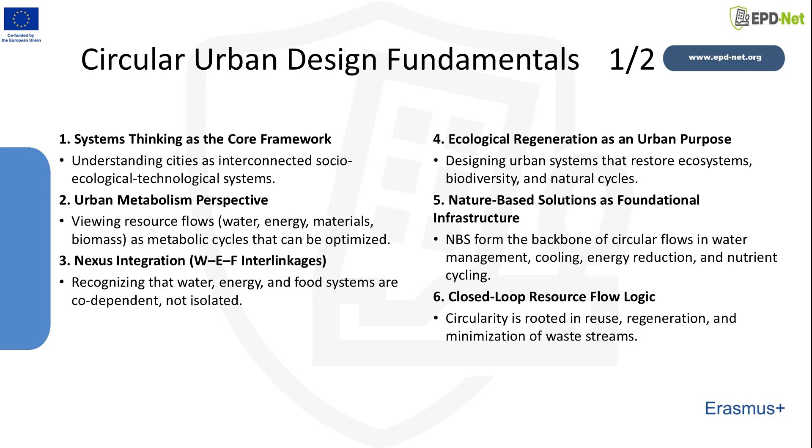This slide visually reinforces the same six points. What is important here is not to read them as separate ideas, but as a connected framework. Systems thinking, ecological regeneration, and nature-based solutions all work together.

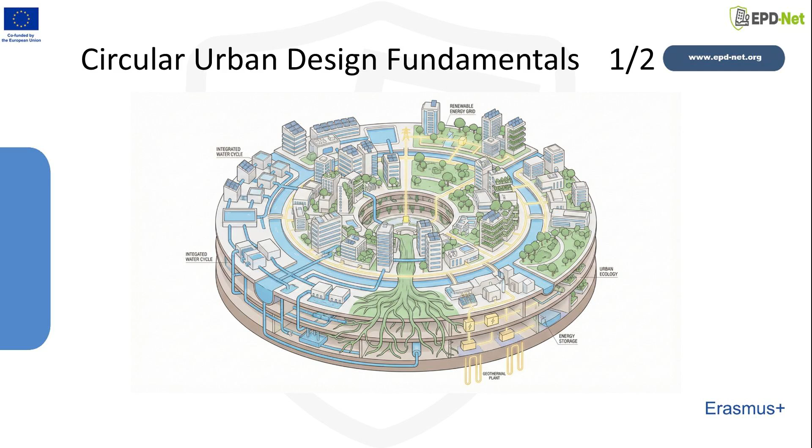In circular urban design, the city is no longer seen as a place where resources simply enter and leave. Instead, it becomes a place where flows can be restructured, supported by ecological processes, and redesigned to reduce loss and increase long-term urban performance. The second half of the fundamentals adds four more important ideas.

The seventh is multifunctionality, meaning that urban elements should deliver ecological, social, and technical benefits at the same time. The eighth is decentralized and distributed networks, which support local loops and reduce dependence on single centralized systems.

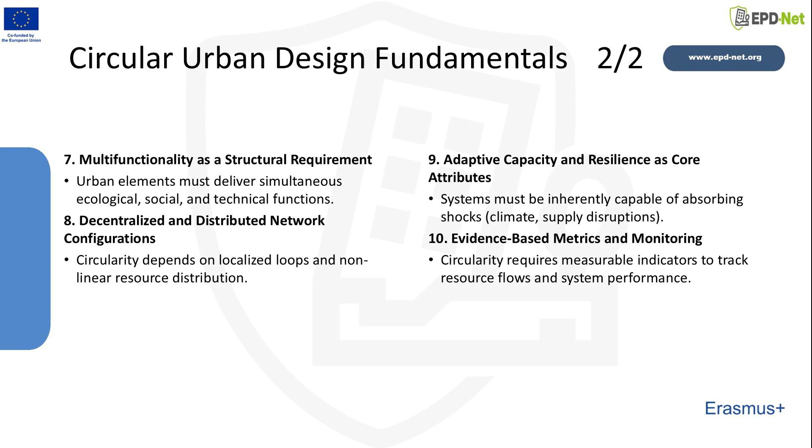The ninth is adaptive capacity and resilience, because circular systems should be able to absorb shocks such as climate stress or supply disruption. The tenth is evidence-based monitoring, since circularity requires indicators and measurable performance in order to be effectively managed over time. This slide continues the visual presentation of those last four principles.

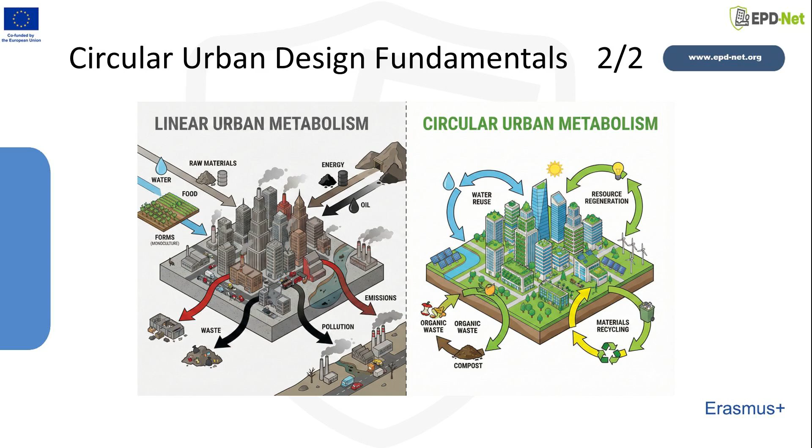Together, these ideas show that circular urban design is not only about reducing waste. It is also about creating urban systems that are more flexible, more integrated, and more capable of responding to change. Multifunctionality, decentralization, resilience, and monitoring help translate circularity from a broad vision into an urban design approach that can be assessed and improved over time.

After defining the fundamentals, we now move to the principles of circularity in urban systems. While the previous slides introduced the conceptual foundation, this section focuses more directly on how circularity can guide planning and design decisions. These principles help us understand what kind of interventions are needed if we want to move from a linear model of resource use toward more regenerative and interconnected urban systems.

The first six principles are listed here. First, we should prioritize resource efficiency before expanding supply, which means reducing demand before adding new infrastructure. Second, we should design multifunctional solutions, so that one intervention can solve several problems at once. Third, circularity requires us to close loops through reuse, recovery, and regeneration.

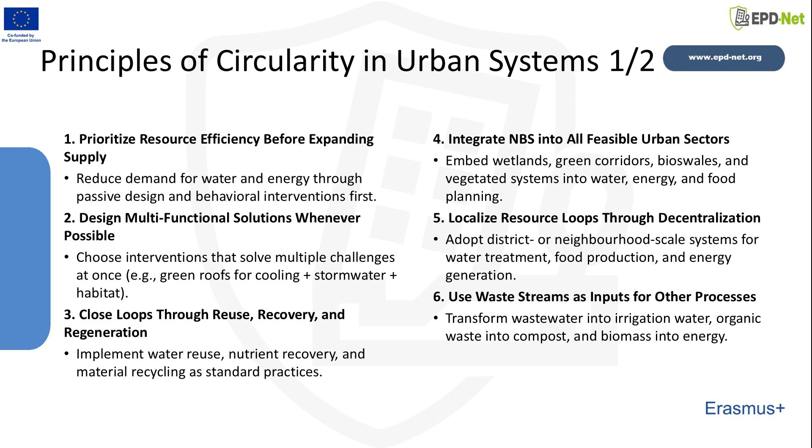Fourth, nature-based solutions should be integrated into all feasible urban sectors. Fifth, resource loops should be localized through decentralization. And sixth, waste streams should be used as inputs for other processes, turning wastewater, biomass, and organic waste into useful resources. This slide emphasizes those same first six principles in visual form.

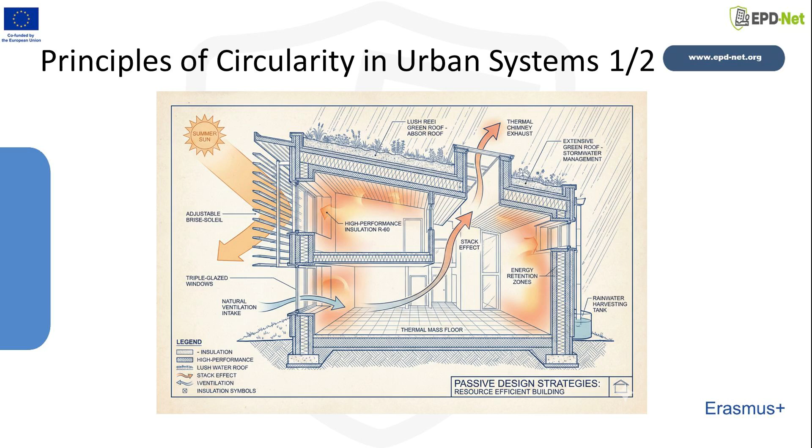The key message here is that circularity depends on a shift in logic. Urban systems should not be organized around one-way flows and end-of-pipe disposal. Instead, they should be designed around reduced demand, repeated use, and interconnection between systems. What looks like waste in a linear model may become a valuable input in a circular one. This is one of the central changes in circular urban thinking.

The second half of the principles focuses on enabling conditions. First, interventions should be designed for climate adaptation and resilience, meaning that they should contribute to flood mitigation, heat reduction, or redundancy. Second, circularity requires stakeholder engagement across sectors and communities, because no single profession can manage all urban flows alone. Third, governance, policy, and finance must be aligned to support circular solutions.

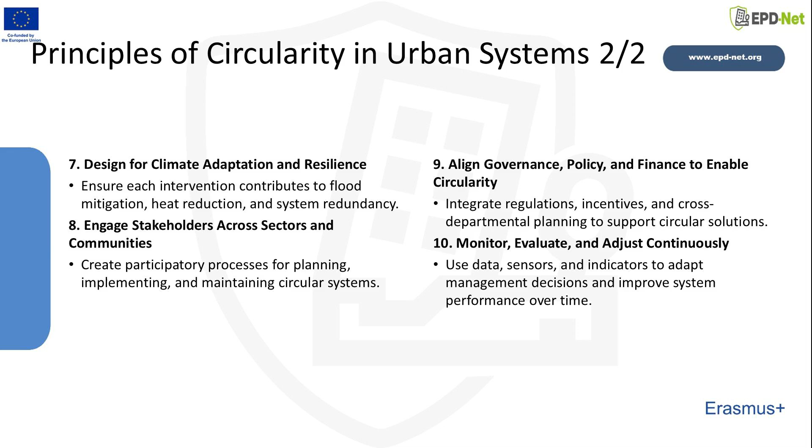And fourth, circular systems need to be monitored, evaluated, and adjusted continuously. Circularity is therefore not a one-time design act, but an ongoing process of learning and adaptation.

This slide reinforces an important point: circular urban design is not only technical. Even the best design solutions will remain limited if institutions, communities, and governance systems do not support them. That is why resilience, participation, policy support, and monitoring are essential.

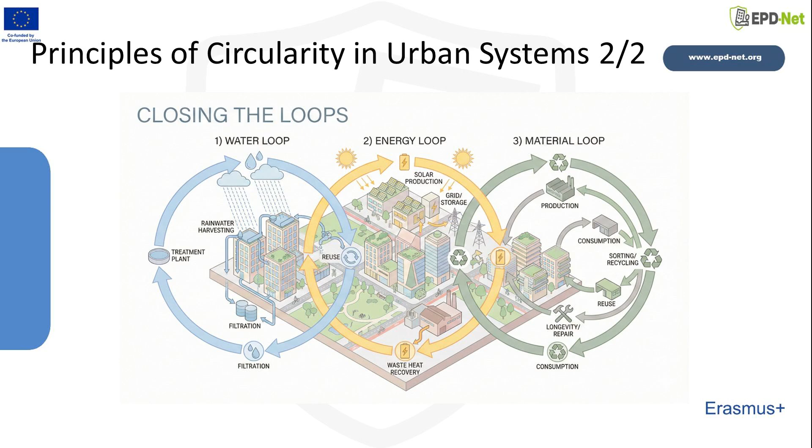Circularity needs collaboration, institutional continuity, and regular evaluation if it is to become part of mainstream urban practice rather than remain a small-scale experiment. This section introduces the transition from linear to circular flows.

It shifts the discussion from broad principles to the actual movement of resources through the city. The question is no longer only what circularity means, but how water, energy, and materials can remain in use for longer, how waste can be reduced, and how urban systems can be redesigned to function through loops rather than one-way extraction and disposal. The first 5 key points explain the core problem and the basic alternative.

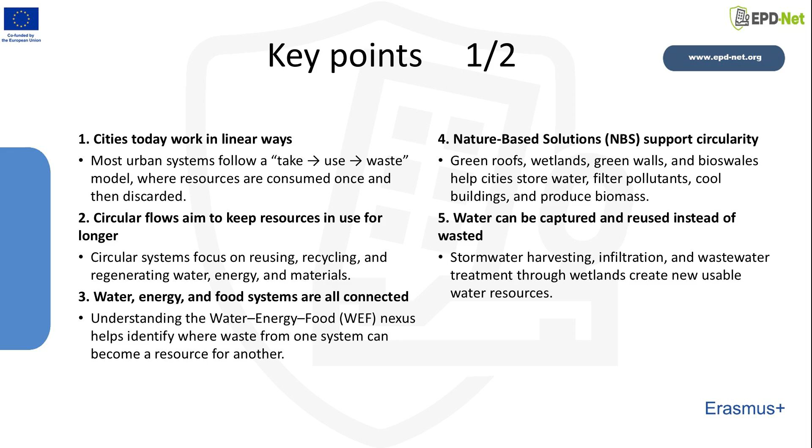First, cities still largely work in linear ways, following a take-use-waste model. Second, circular flows aim to keep resources in use for longer through reuse, recycling, and regeneration. Third, water, energy, and food systems are interconnected, which is why the WEF nexus is important. Fourth, nature-based solutions support circularity by storing water, filtering pollutants, cooling buildings, and producing biomass. And fifth, water can be captured and reused through stormwater harvesting, infiltration, and wetland-based treatment rather than simply being drained away.

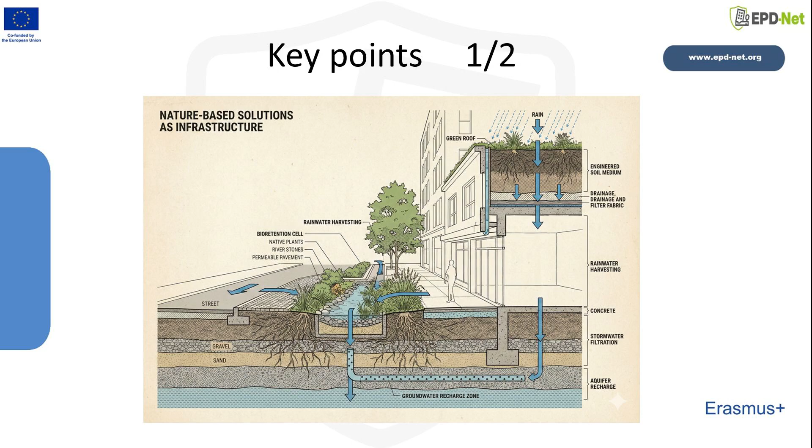This slide visually continues the same argument. The key issue is that linear systems generate loss at every stage. Circular systems try to slow down those losses and convert them into useful cycles. Water is one of the clearest examples. In many conventional cities, stormwater is treated mainly as a drainage problem. In circular urban design, that same water can be retained, filtered, infiltrated, and reused in ways that support both ecological and urban performance.

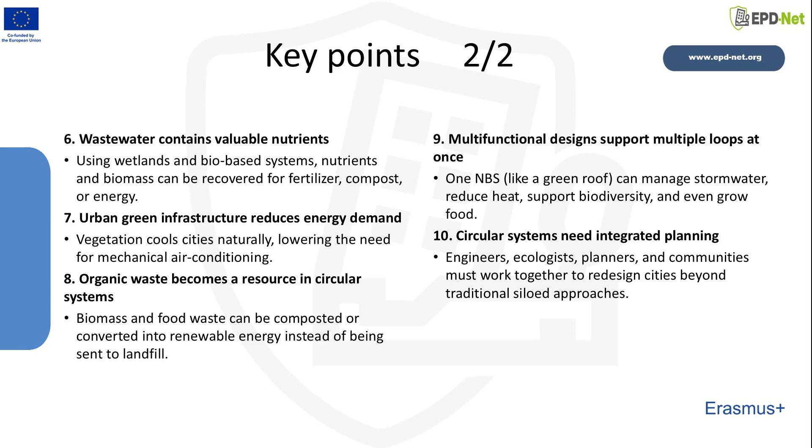The next 5 key points extend this logic. Sixth, wastewater contains valuable nutrients, which means it can support fertilizer, compost, or energy production if treated appropriately. Seventh, urban green infrastructure reduces energy demand by cooling cities naturally and decreasing reliance on mechanical air conditioning. Eighth, organic waste becomes a resource when it is composted or converted into renewable energy. Ninth, multifunctional designs support several loops at once, as in the case of a green roof that manages stormwater, reduces heat, and supports biodiversity. 10th, circular systems require integrated planning across professions and sectors.

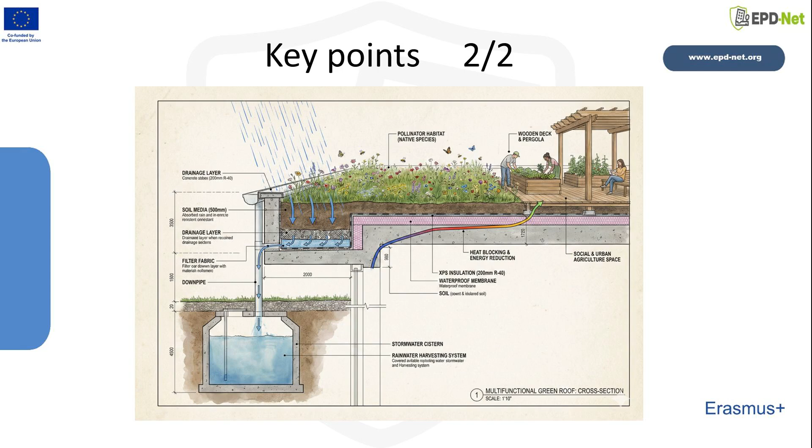This slide reminds us that circularity is most effective when systems are not planned in isolation. Water, biomass, materials, ecological processes, and urban design decisions all interact. That is why engineers, ecologists, planners, designers, and communities need to work together. Integrated planning is not just an organizational preference here. It is necessary because circular systems depend on the relationships between different flows and different forms of expertise.

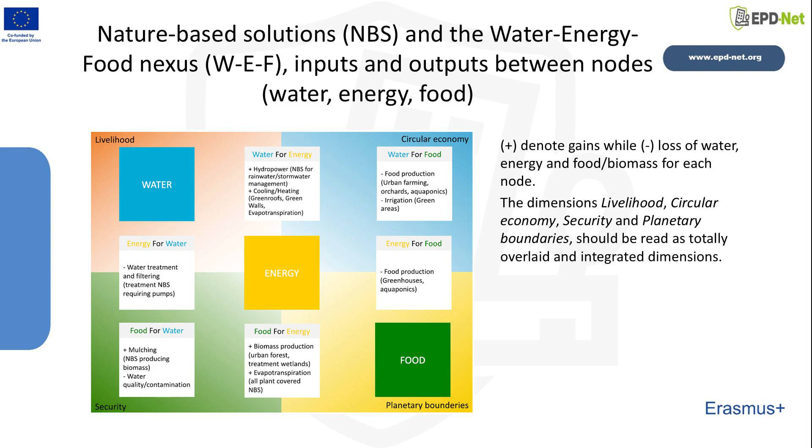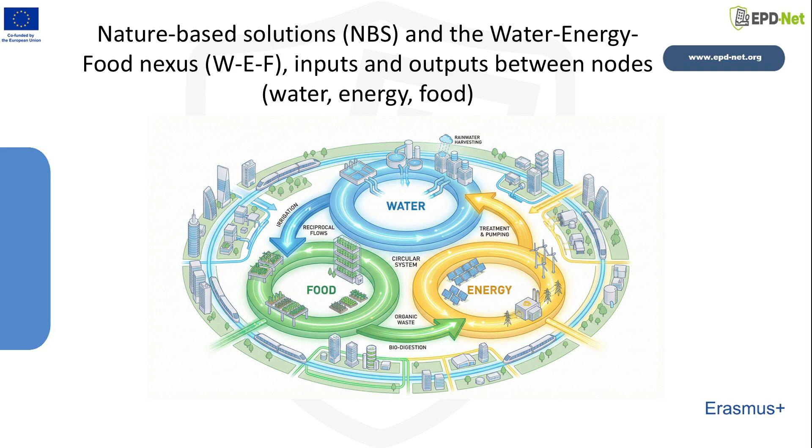Nature-based solutions help strengthen these connections in more circular ways. What is especially important in this diagram is that broader dimensions such as livelihood, circular economy, security, and planetary boundaries are overlaid on top of the resource flows. This means circular urban design is not only about technical efficiency. It is also connected to social well-being, economic models, long-term resilience, and environmental limits. The WEF nexus therefore becomes more than a technical tool. It becomes a way of seeing cities as layered systems in which ecological, social, and infrastructural processes are deeply entangled.

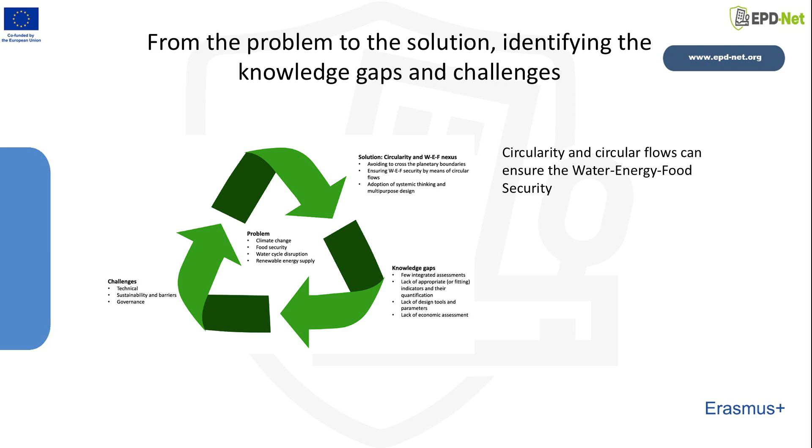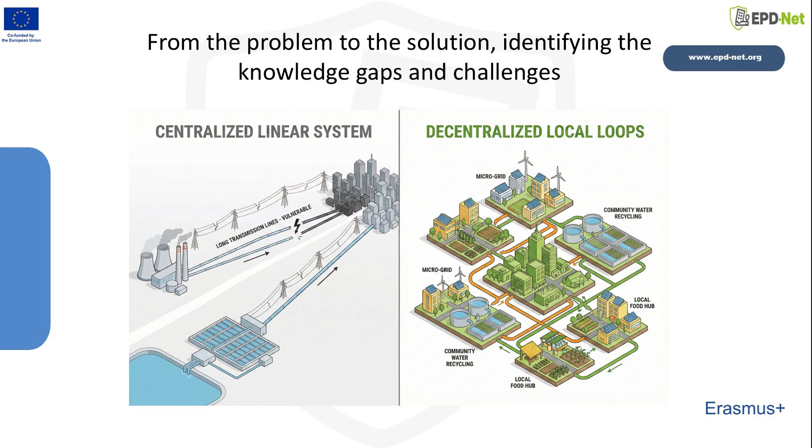Circularity requires us to recognize where the gaps are, whether they concern coordination, awareness, technical capacity, or cross-sector understanding. The broader message here is that circular flows can help ensure water, energy, food security, but only if the gaps between problem recognition and solution development are addressed. In other words, circularity depends on learning as much as on infrastructure. It depends on connecting sectors, combining different types of expertise, and moving from isolated technical responses toward system-based strategies that respond to multiple urban challenges at once.

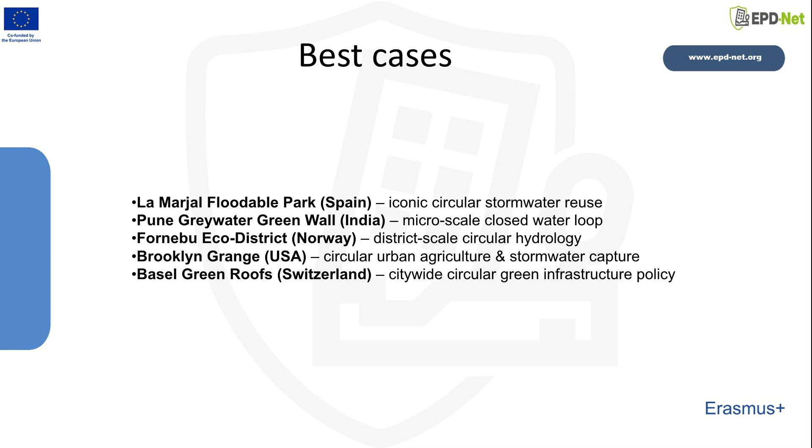The presentation now turns to a set of best cases. These examples are important because they show that circular urban design can operate at multiple scales and in different forms. Some cases focus on floodable public landscapes, others on greywater reuse, district redevelopment, productive rooftops, or citywide policy. Together, they demonstrate that circularity is not limited to one model. It can be adapted to different urban conditions while still following the same basic logic of reuse, regeneration, multifunctionality, and integration.

La Marjal Floodable Park is presented here as an iconic example of circular stormwater reuse. The project demonstrates how a single urban space can perform several functions at once: flood protection, water storage, water reuse, climate regulation, biodiversity support, and community education. This is a strong example of circular urban design because it combines infrastructure and landscape instead of separating them.

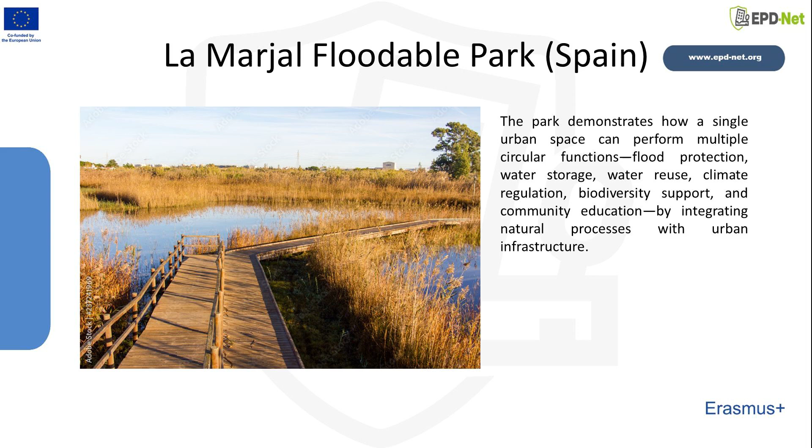Water is not treated only as a hazard to be removed, but as a resource to be retained and managed through a multifunctional public space. This image reinforces the idea that circularity can be spatial and visible.

La Marjal is not hidden infrastructure. It is a public urban landscape that makes circular water management legible. That is important because circular urban design often works best when ecological and technical processes are not concealed but integrated into public space.

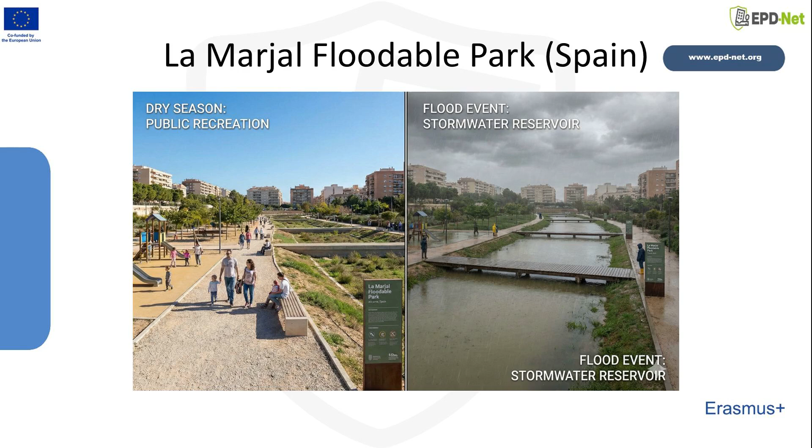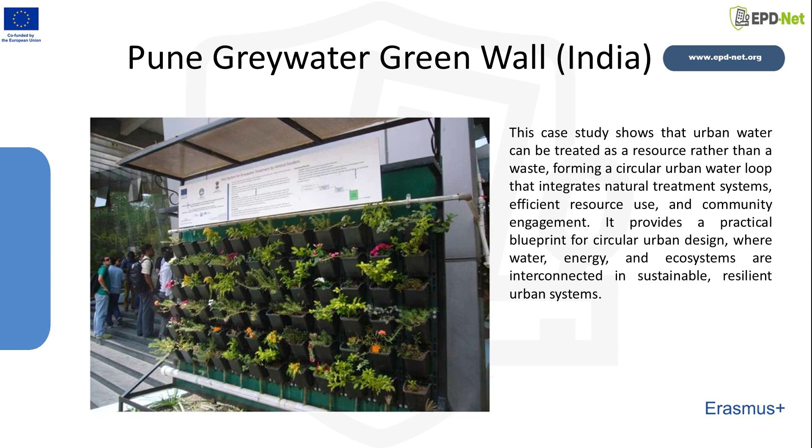The project shows how natural processes can support flood control while also improving urban amenity and environmental quality. The Pune Greywater Green Wall case shows that urban water can be treated as a resource rather than a waste product. It demonstrates a micro-scale circular urban water loop by integrating natural treatment systems, efficient resource use, and community engagement. The project is valuable because it proves that circularity does not only belong to large-scale infrastructure projects.

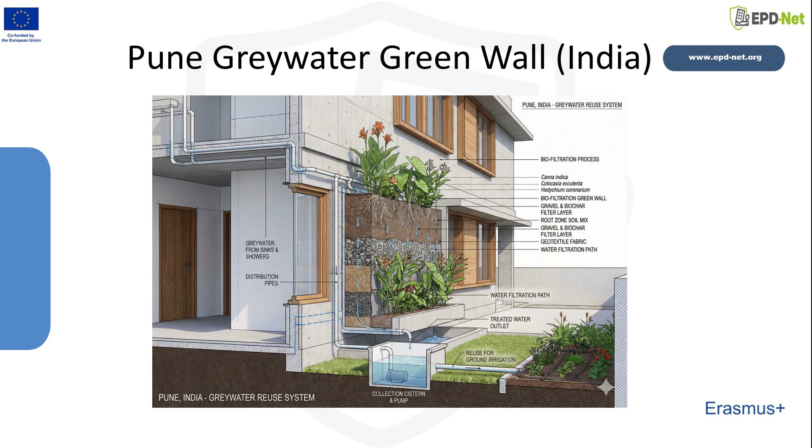Even relatively small interventions can create effective loops when water is filtered, reused, and connected to ecological systems rather than simply discharged as waste. This slide highlights the applied side of the case. The project provides a practical blueprint for circular urban design because it links water treatment, ecological function, and user awareness. It also shows that circularity often depends on rethinking ordinary urban systems. Greywater, which is usually overlooked or discarded, becomes part of a useful and visible loop. In this sense, the project is both technical and educational, demonstrating how communities can interact with circular infrastructures.

The Fornebu Eco-District is a district-scale example of circular urban transformation. It shows how a post-airport site can be redeveloped through land reuse, ecological regeneration, and an adaptable urban structure. The project integrates blue-green infrastructure, energy-efficient building standards, and multimodal mobility.

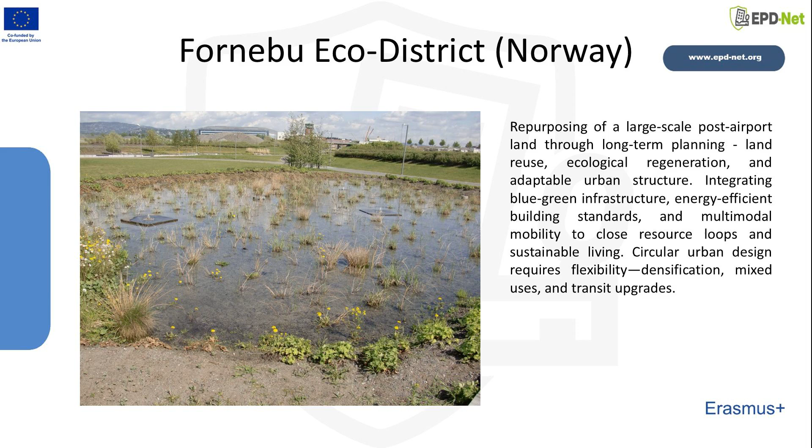It is especially important because it demonstrates circularity at a larger urban scale. Here, circular urban design is not limited to one intervention, but becomes part of a broader redevelopment strategy involving land, infrastructure, mobility, and long-term planning.

The image of Fornebu helps underline another key idea: circular urban design requires flexibility over time. Densification, mixed uses, and transit upgrades are not fixed outcomes but parts of an evolving urban structure.

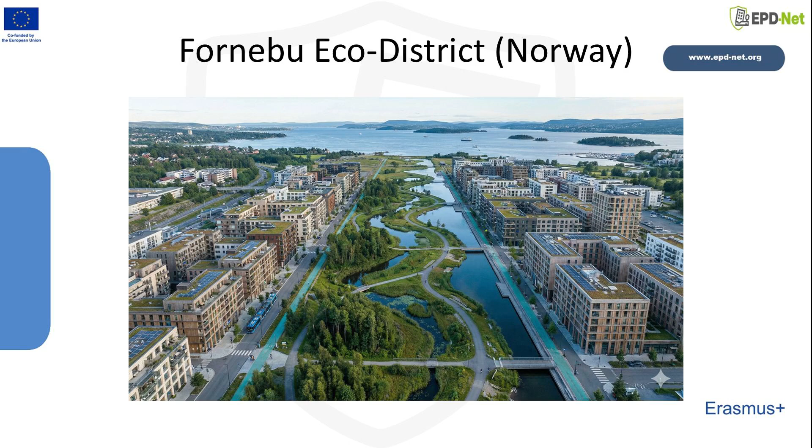The case therefore shows that circularity is not only about closed loops in the present, it is also about building urban systems that can adapt as needs, technologies, and environmental conditions change in the future.

Brooklyn Grange exemplifies circular urban design by transforming idle rooftops into productive systems. Its green roof infrastructure captures and reuses stormwater, while engineered soils support long-lasting nutrient cycles. On-site food and honey production shorten supply chains and reduce waste.

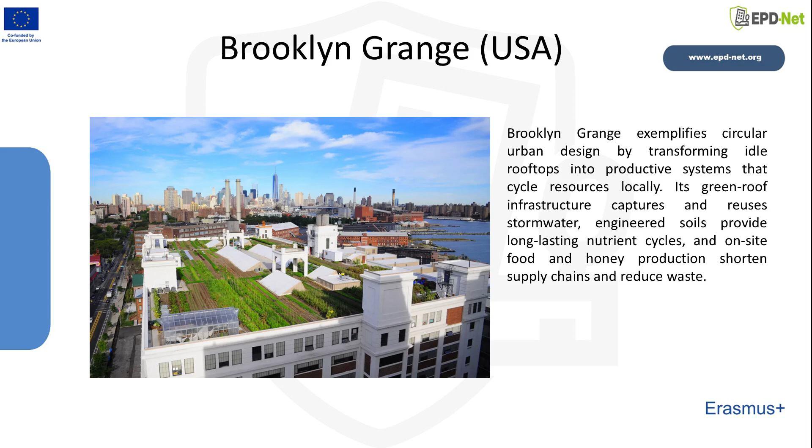This is an excellent example of how circularity can work at the building and rooftop scale. It demonstrates that even surfaces usually considered unused can become active components of urban metabolism and local resource cycling.

This slide makes the productivity of the rooftop landscape more visible. What matters here is that one intervention creates several benefits at once: water management, food production, biodiversity support, and a reduction in resource waste.

Brooklyn Grange therefore reflects the principle of multifunctionality very clearly. It also shows that circular urban design can emerge through retrofitting existing urban surfaces, not only through entirely new master plans or large redevelopment projects.

Basel Green Roofs is presented as a case where circularity is supported through policy, incentives, and mandatory regulation. By transforming flat roofs into multifunctional ecological surfaces, the city closes loops in water management, reduces building energy demand, and enhances urban habitats.

This case is especially important because it shows that circular solutions can be mainstreamed.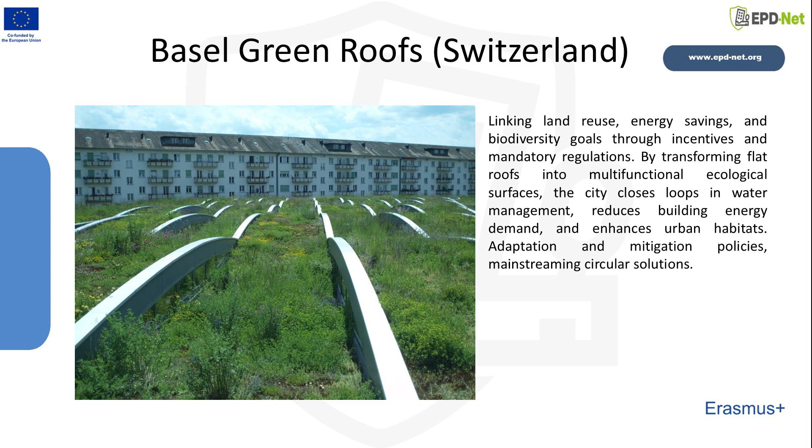They do not have to remain isolated pilot projects. When governance supports them, circular design strategies can become part of wider urban policy and building practice.

This image helps reinforce the broader lesson of Basel. Circular urban design needs not only good projects, but also institutional support. Green roofs in this example contribute to adaptation and mitigation at the same time.

They reduce heat, support biodiversity, and improve water performance. The case shows how circularity becomes more effective when ecological design is backed by policy continuity and city-scale implementation frameworks.

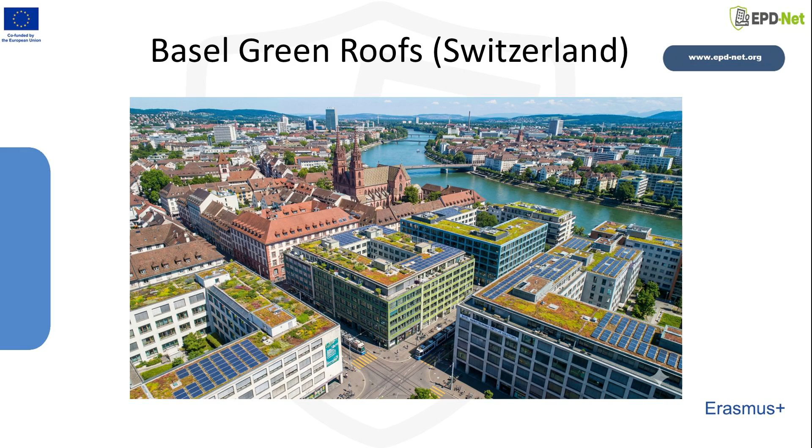At this point, we can briefly pause and reflect on the common thread across all of these cases. Although the projects differ in scale and context, they all show that circular urban design works by connecting systems rather than separating them. Water, ecology, energy, materials, public space, and governance are all brought into a shared framework.

This is what allows circularity to move from a theoretical concept to an operational urban strategy.

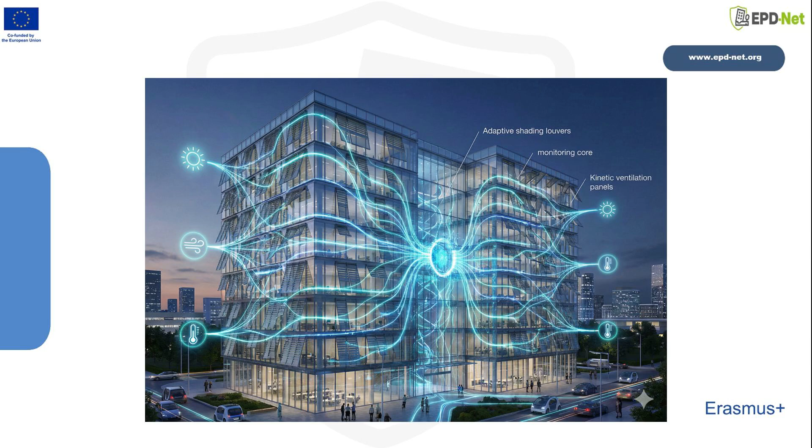To conclude, circular urban design represents a fundamental shift in how we understand and shape cities. Instead of one-way systems of extraction, consumption, and disposal, it promotes regenerative loops in water, energy, materials, and biomass.

The main foundations discussed today include systems thinking, urban metabolism, WEF nexus integration, ecological regeneration, nature-based solutions, multifunctionality, decentralization, resilience, and monitoring. These ideas help create urban systems that are more efficient, more adaptive, more ecologically integrated, and better prepared for long-term sustainability.